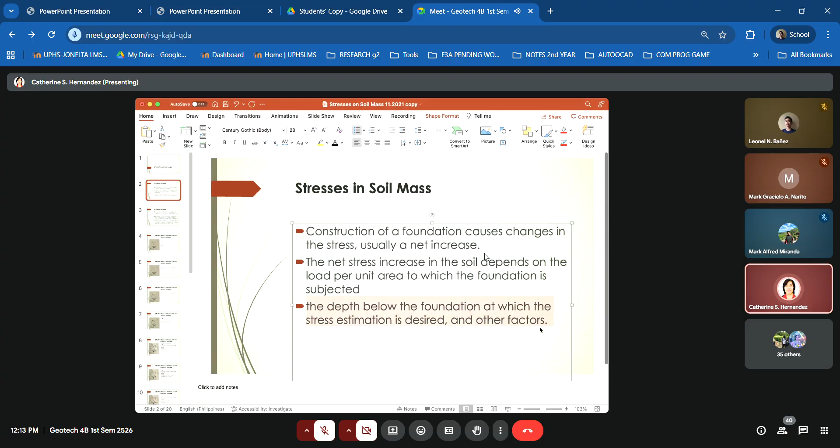It is necessary to estimate the net increase of the vertical stress in soil that occurs as a result of the construction of a foundation, so that we can compute the settlement.

If the settlement you compute as an engineer is excessive, you have to redesign the foundation or do the necessary calculation over again.

This chapter discusses the principle of estimation of vertical stresses, and the vertical stress increase in soil caused by various types of loading.

Although natural soil deposits in most cases are not fully elastic, isotropic, or homogeneous materials, calculations for estimating increases in vertical stress yield fairly good results for practical work.

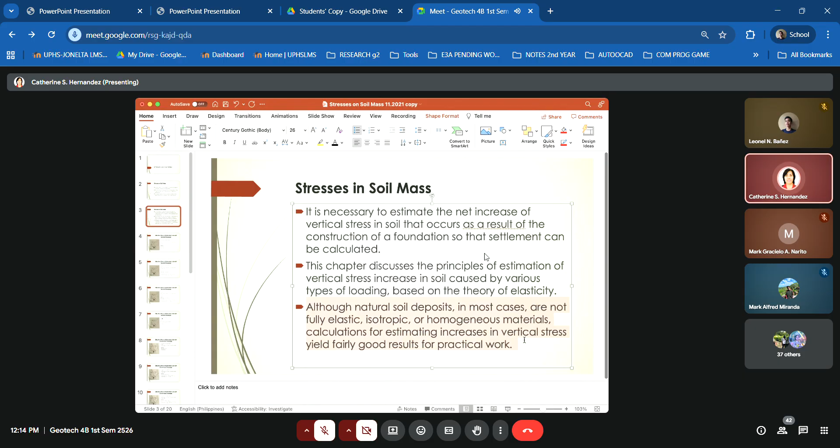We have different conditions of soil, depending on whether there is no seepage, or there is seepage, either upward or downward.

This first one is the effective stress of saturated soil with upward seepage.

Our formula for total stress is the unit weight times the height, or the layer of water or layer of soil for that matter.

The effective stress is the total stress, minus the pore water pressure, or simply pore pressure.

So our effective stress formula is: unit weight times height, minus unit weight of water times the height or the layer of soil or water.

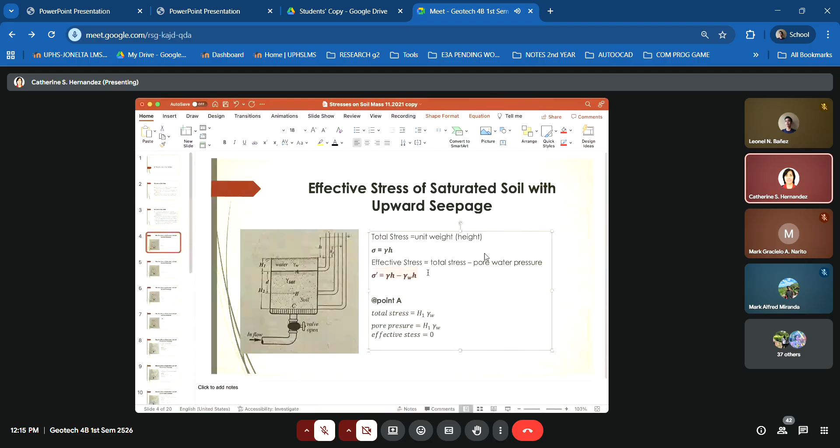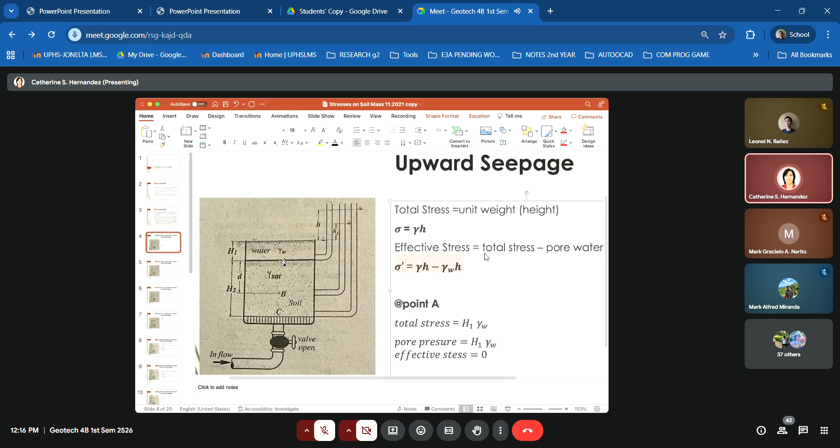Now in this figure, we have point A. There is an observation pipe for point A, for point B, and also for point C.

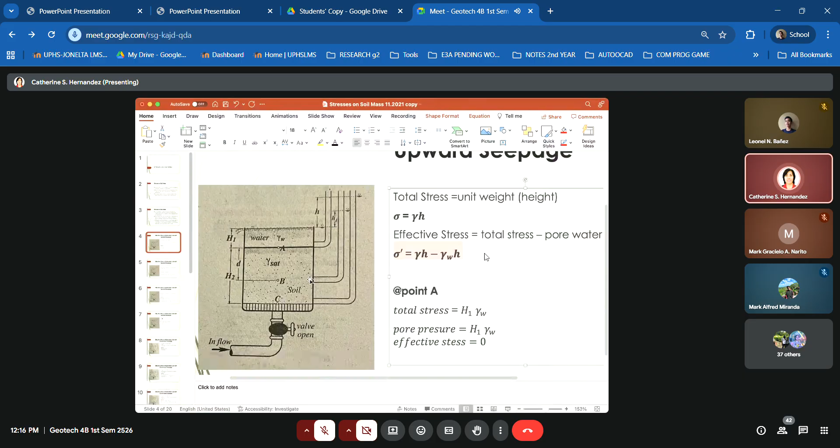Now, at point A - here is point A.

The total stress would be equal to H1, this height here, multiplied by the unit weight of water.

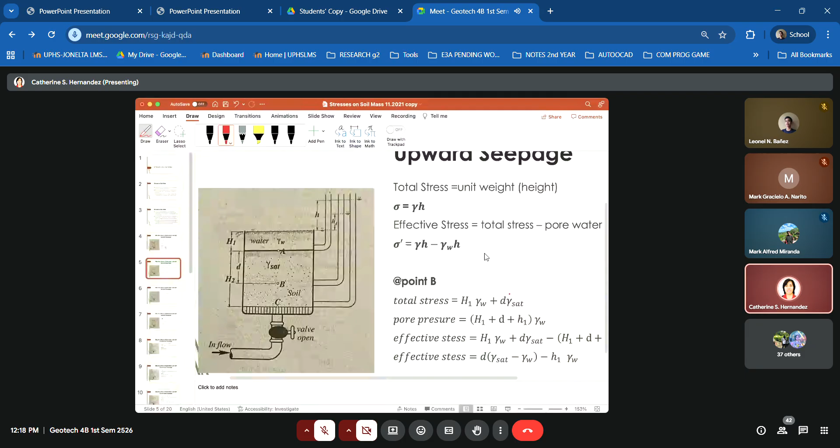So our total stress would be H1 times unit weight of water. And then D, since H2 goes down to the bottom, this is what we consider for the soil.

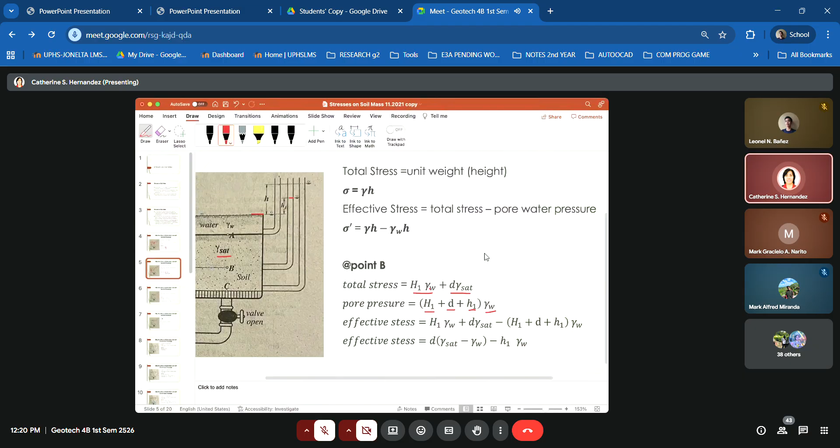And then you multiply it with the unit weight of water. Kaya pag pinagsama natin, total stress minus pore water pressure, nare-reduce yung ating formula dito. Kasi kumbaga ito ay makakancel ito tsaka yan. Kaya ang matitira na lang, gamma sat

Unit weight na saturated minus unit weight ng water times the depth of D. Tapos, bawas yung h1. So, sa inyo, pwede naman ito ang isaulohin nyo, the rest will follow naman. Magka-cancel out lang din yan.

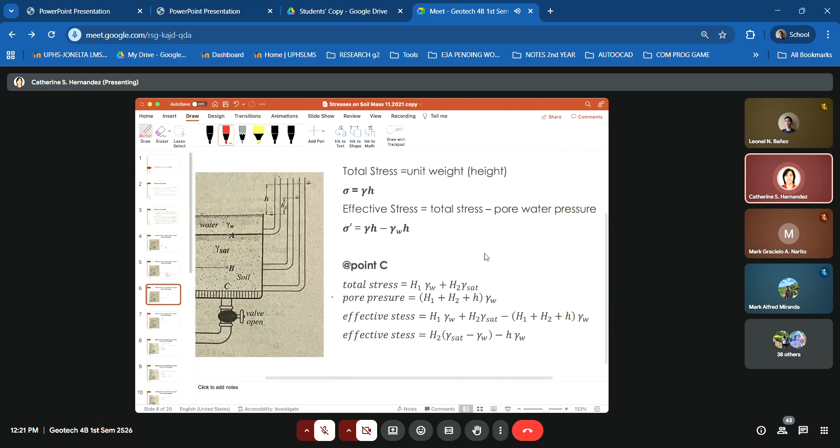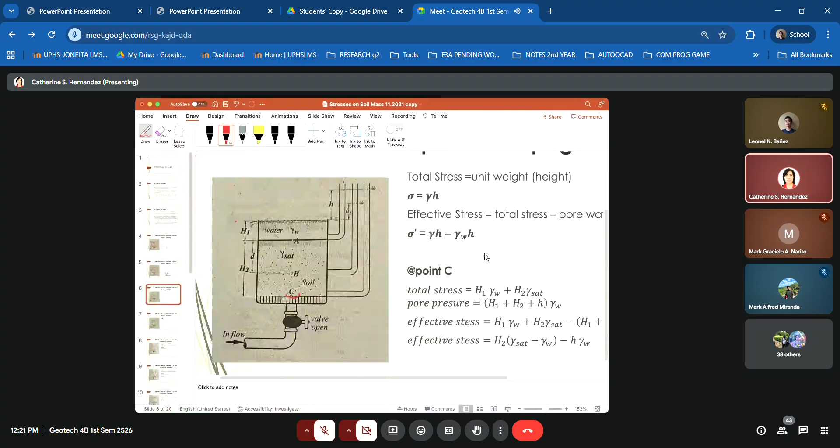Okay. And then for letter C or point C, si point C ay nasa bottom, dito. Ang total stress niya would be buo na: H1 times the unit weight of water, tapos H2 times the unit weight na saturated.

Tapos ang pore pressure would be yung H1 times the unit weight of water, H2 times the unit weight of water, at yung difference ng elevation ng water sa container and the elevation of water at C dito, sa observation pipe sa point C. So yun yung dadagdag, H.

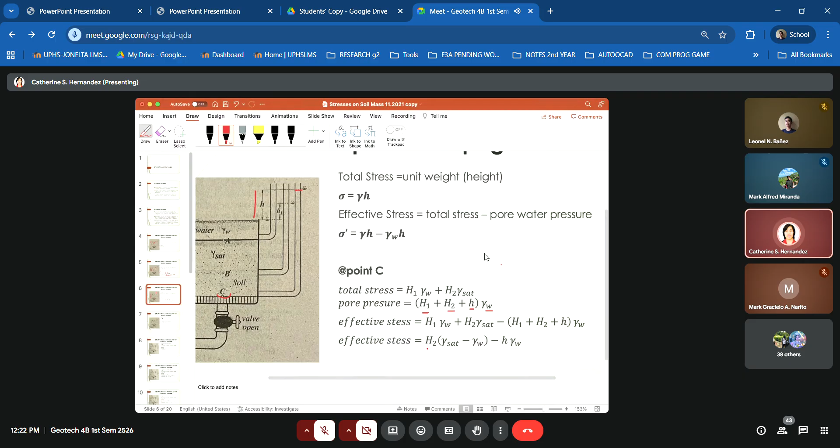And then, pag sinimplify natin, simplify natin, effective stress would be equal to H2 kasi ito ay makakancel na to, tsaka yan. Tapos, ang matitira ay unit weight saturated minus unit weight of water times H2 minus the height of H water dun sa yung difference, times the unit weight of water.

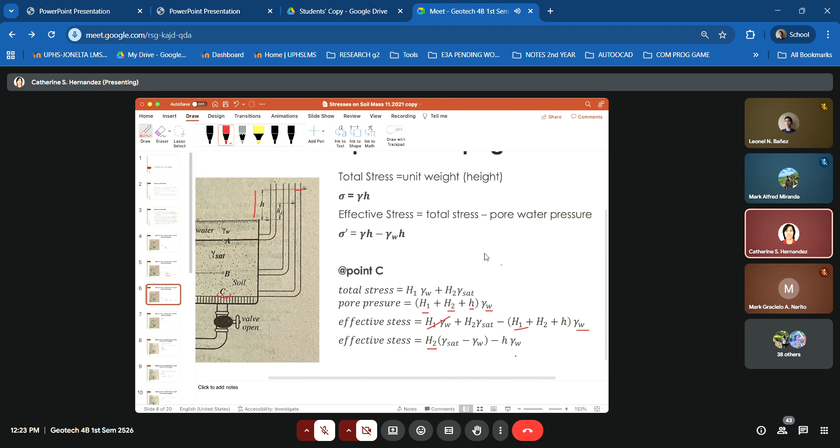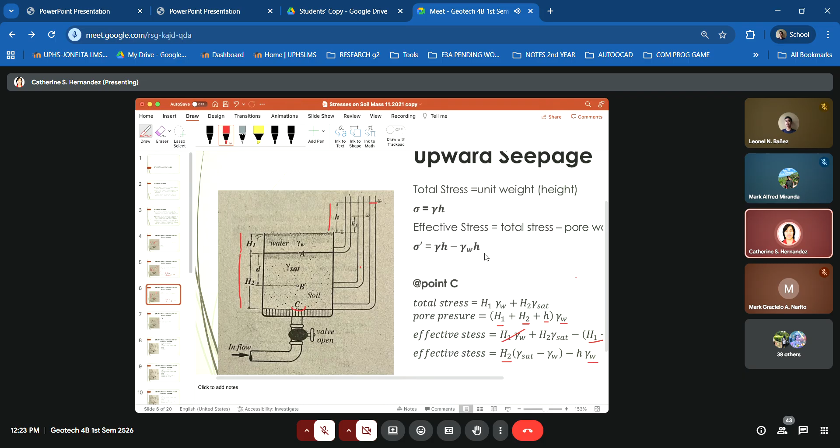So ganyan pag ang seepage ay pataas. The tendency of the water is to go up the pipe. Pag naman downward ang seepage, pababa naman syempre, kasi kumbaga bababa yung tubig dun sa pipe naman, pababa ang agos. Ito ay pataas, upward ang seepage.

Kung sana upward, downward. Another formula that you might encounter, yung seepage force per unit volume. Force is equal to height or head loss, H, head loss divided by the length of soil times the unit weight of water. Or simply, di ba dun sa natin, hydraulic conductivity, you encountered I, hydraulic gradient, that is the head loss divided by the length of soil. So, yung formula could also be written as I times the unit weight of water.

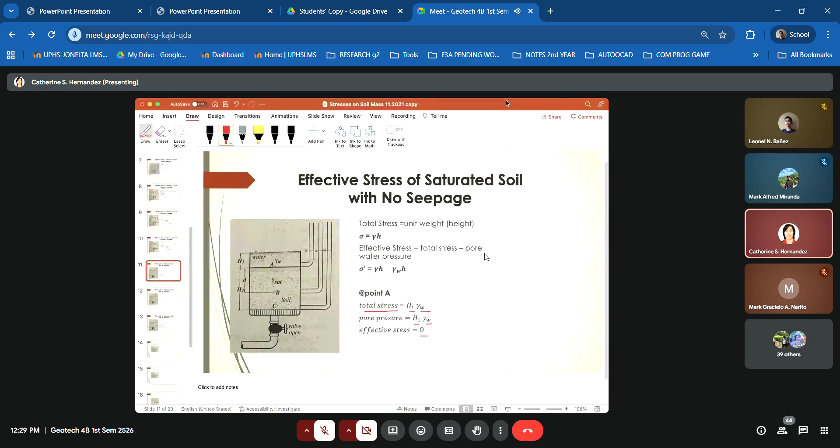May soil condition din tayo na ideal, parang theoretical lang ito - walang seepage, ibig sabihin hard strata yung nasa ilalim kaya hindi bumababa yung tubig. Ang total stress natin sa point A ay equal to H1 times unit weight of water. Tapos ang pore pressure ay H1 times unit weight of water. Sa tatlong conditions, pare-parehas na ang effective stress sa top ng soil ay 0, dahil nagka-cancel out lang yung stress due to water na parehas.

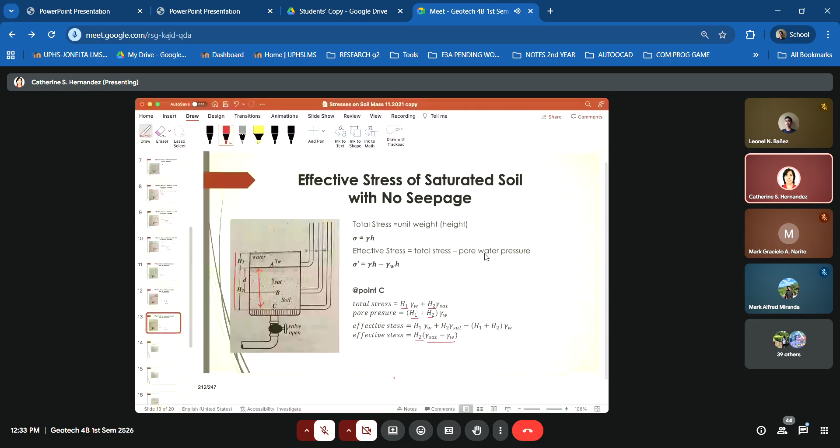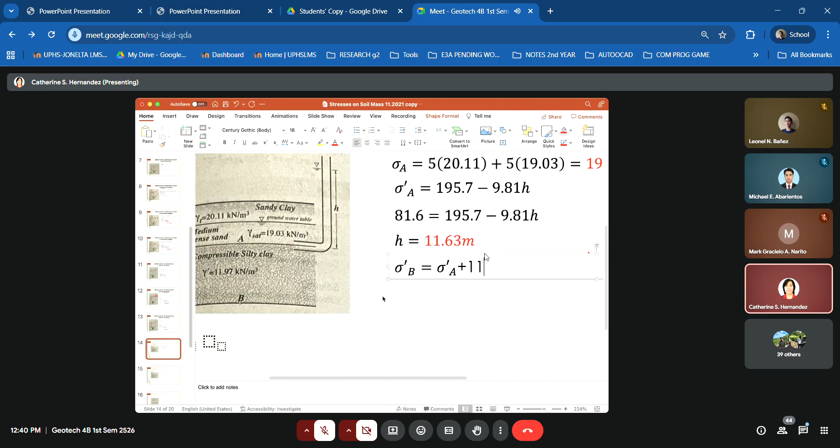Plus 11.97 times yung depth na 20. Yun na yung effective stress at B. Ayan ako. Sisave ko para mamaya.

Okay. Dito na lang pala sa dulo. And our answer is, for the effective stress at B, dapat pala lagay ko dito. Sa A is 19, 81.6. Plus 11.97 times 20. 321.01 kilo Pascal. Okay.

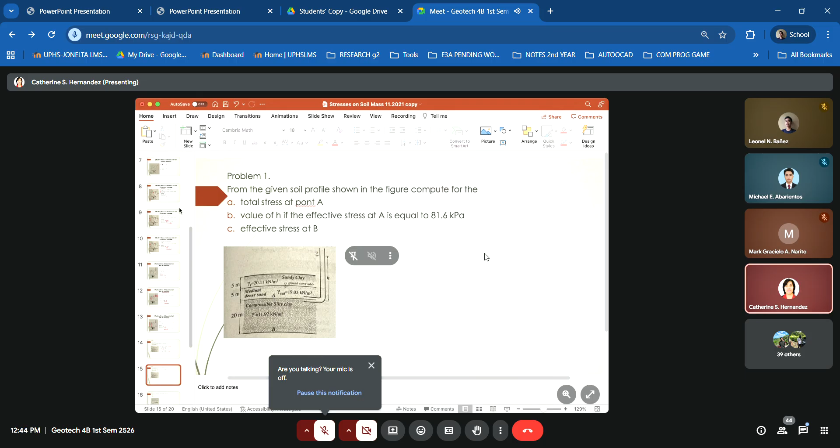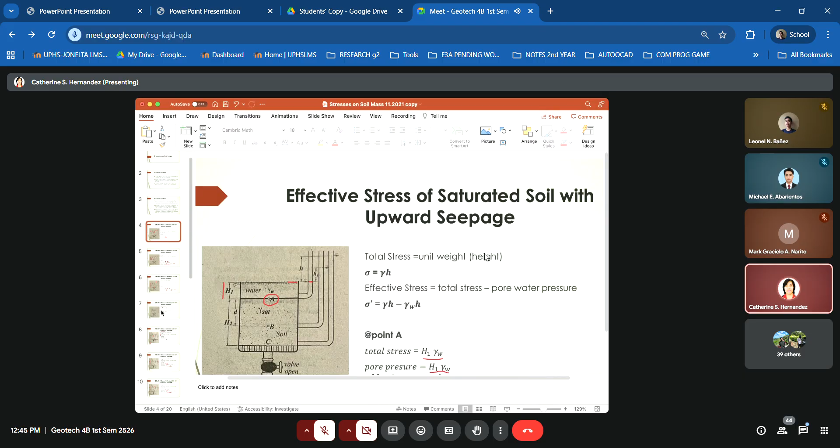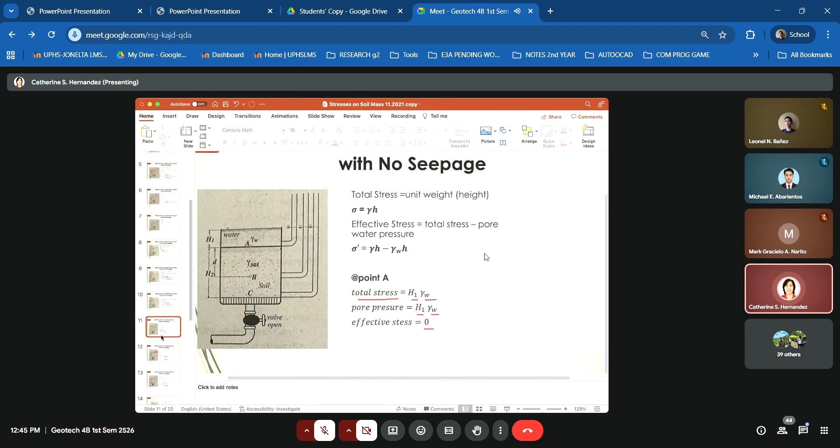Babalikan ko ha. Ito yung case 1. Look at the elevation of water inside the observation pipes. Tapos ito yung case 2. Tapos ito naman yung case 3. Now, what I'm asking is anong case yung problem, itong problem na to?

Case 1, upward yung seepage. Okay. Sunod, ito naman tayo. Ito ko yung edit yun. Problem 1 nga, no? Okay.

Okay. So, in problem number 2, walang observation pipe. Simply layers of water lang, tapos sa ilalim ay rock. Kaya, ibig sabihin, ito naman ay anong case? This problem number 2, anong case ito?

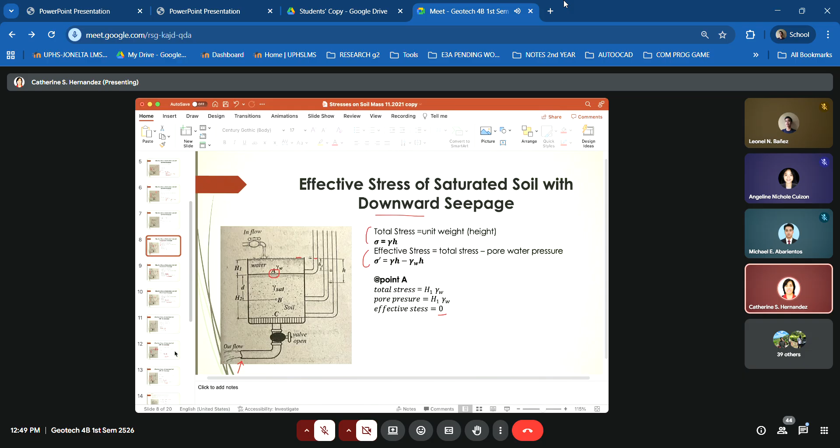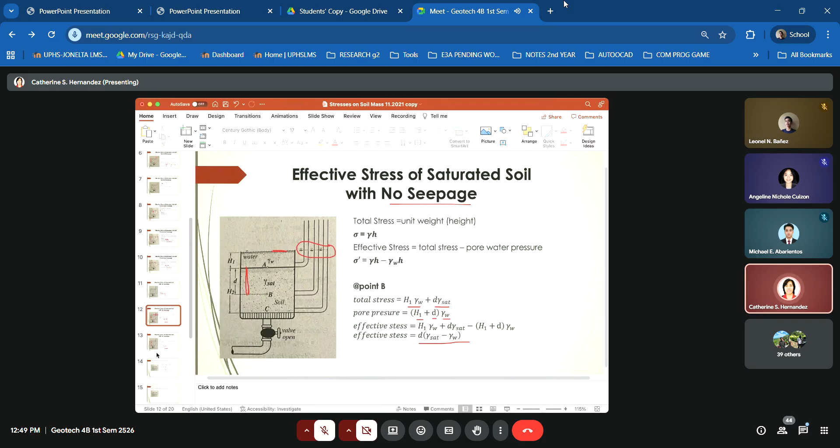Yung elevation ng water ay constant, no? At sarado yung valve sa ilalim. Ibig sabihin, hindi tumatagas yung tubig, no? So dito class, sa second example, tingnan ninyong maigi, rock yung bottom. So what will happen? Yung tubig, hindi siya bababa or mag-seep in dun sa bottom layer. So that's case 3, no? Case 3 ito.

So dito sa case 3, pinapahanap yung effective stress immediately below A. Yun nga lang, hindi agad binigay yung unit weight ng soil. Kaya kailangan nating i-compute yung unit weight ng lupa. Now, dun sa nasa first layer on top of A ay dry, no? Dry sand. Di kunin natin muna yung dry unit weight nung sand sa ibabaw. Nare-recall niyo pa ba? Formula for dry unit weight.

Dry unit weight. Saan na yun? Okay. Dry.

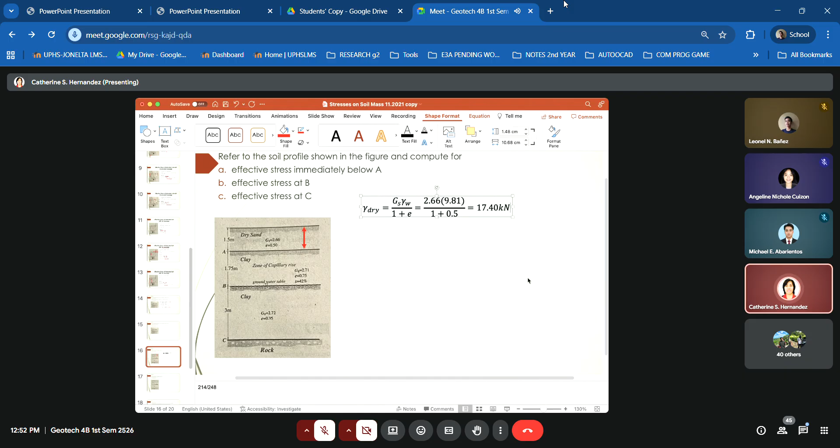Kilonewton per cubic meter. Okay, pag nakuha na natin yan, pwede na natin kunin ang total stress. Total stress would be equal to, ano ba natin?

Total stress. Total stress natin would be yung unit weight, 17.40, times the height of 1.5. So that's about 26.1 kilopascal.

And then, pinapahanap ay immediately below A. Now, we can compute for the pore water pressure. Dun sa libro, U ang tawag dito, yung letter na ginagamit for the pore water pressure.

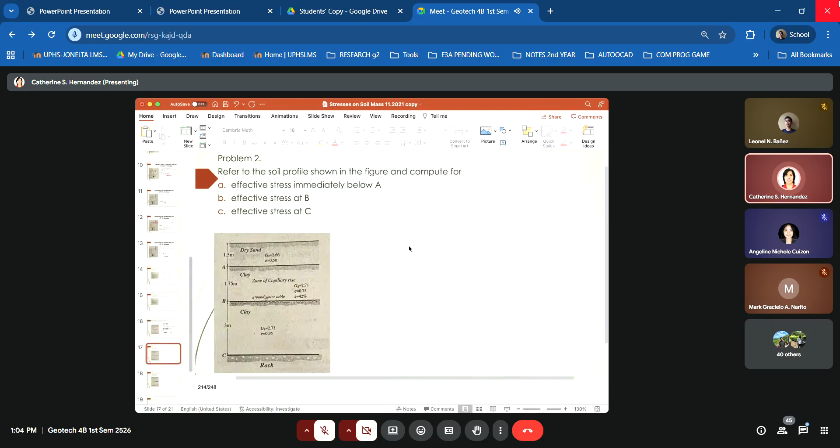Copy tayo dito para madali. So, dito sa C, saturated. So, ang formula natin for saturated is GS plus E times the unit weight of water, over 1 plus E.

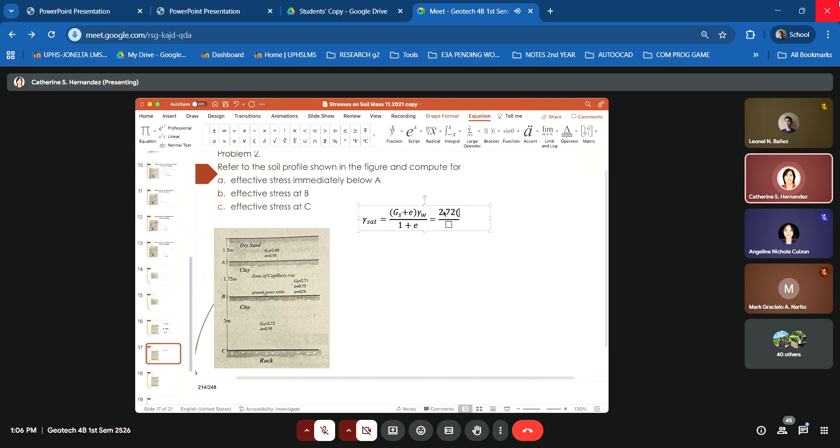Okay. If we're going to substitute the values in the given problem, we have: ang GS bottom ay 2.72, dapat parenthesis, plus ang value ng E ay 0.95. Unit weight ng water, 9.81. Below would be 1 plus the value of E is 0.95.

Okay. With that, ang saturated unit weight... ay 18.46 kilopascal. Ay, unit weight pala to. Kilonewton per cubic meter.

18.46. Sunod ay pwede na natin gamitin para makakuha ng effective stress at C. So, ang ating effective stress at C, gagamitin natin yung 55.78, yung sa B. That would be equal to 55.78. Bale, yung sa C ay effective stress at B plus yung distance na 3 times the saturated unit weight minus unit weight ng water.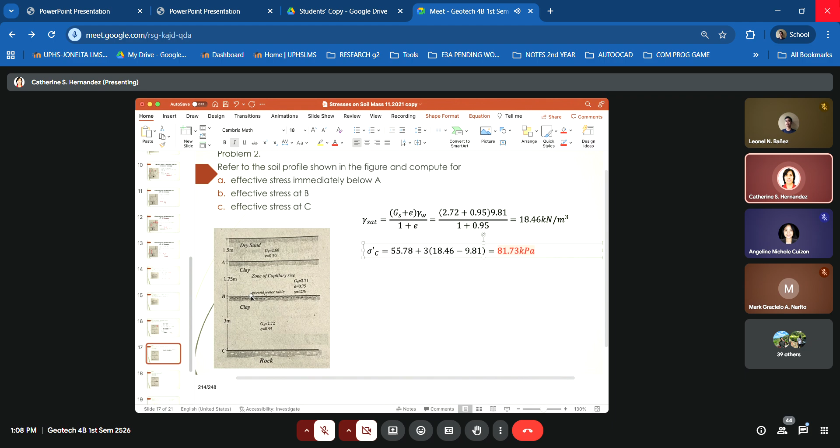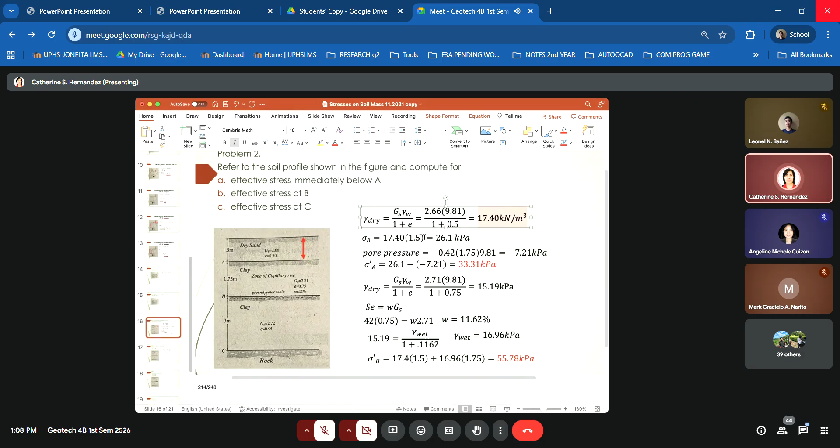Okay, so from dry soil sa top to moist soil and then saturated dun sa pinakang third layer. So what we did is determine the dry unit weight ng first layer, multiply it by the height. Tapos determine the pore water pressure and i-minus siya dun sa effective, sa total pressure minus pore water pressure. We have 33.31. Sa point B, what we did is determine the wet unit weight, and then i-add natin siya dun sa effective stress at A. So ito yung effective stress at A, at ito yung additional, at sa B, ito na siya. Doon naman sa C, effective stress at C, tapos additional yung stress na co-contribute ng layer, yung final layer from B to C. Ayan. Okay na.

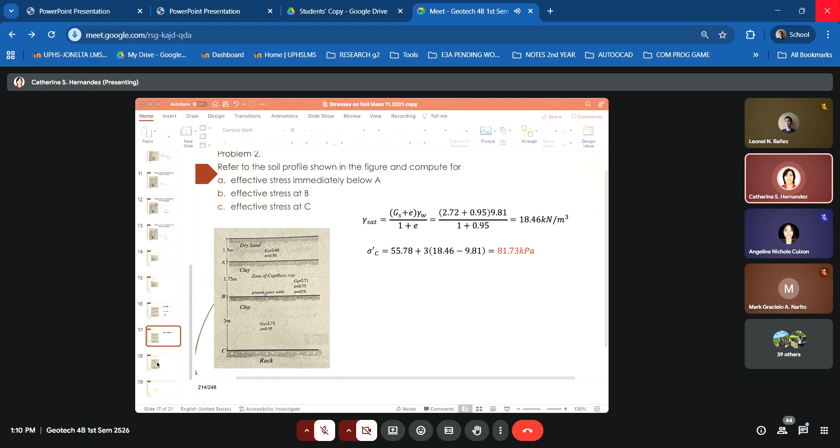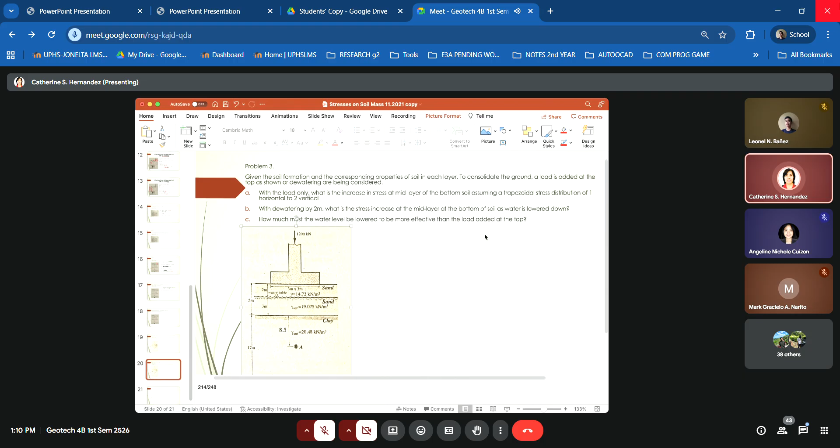Next example ay ito. So this one ay merong footing, may structure na naka-rest dun sa ground. So ano mangyayari? Merong siyang change in pressure due to this load. So, given the soil formation and the corresponding properties of soil in each layer, to consolidate the ground, a load is added at the top as shown, or dewatering are being considered. So, it's either dadaganan daw yung lupa para ma-consolidate, or ibababa yung level ng water para you will get the same result, kasi pag ibinaba mo yung level ng water, ang tendency ay tataas ang pressure din, kasi kung yung presence ng water ay nagpapababa ng pressure, mas lighter kasi yung tubig kaysa sa soil.

With the load only, what is the increase in stress at mid-layer of the bottom soil, assuming a trapezoidal stress distribution of one horizontal to 2 vertical?

Yung ganitong case, yung sinasabi niyang one horizontal, 2 vertical, ang mangyayari dito is magkakaroon tayo ng parang yan, parang palda, sa magkabilang side, kasi habang bumababa ka, yung pressure sa ilalim ay lumalaki. Nagiging wider to.

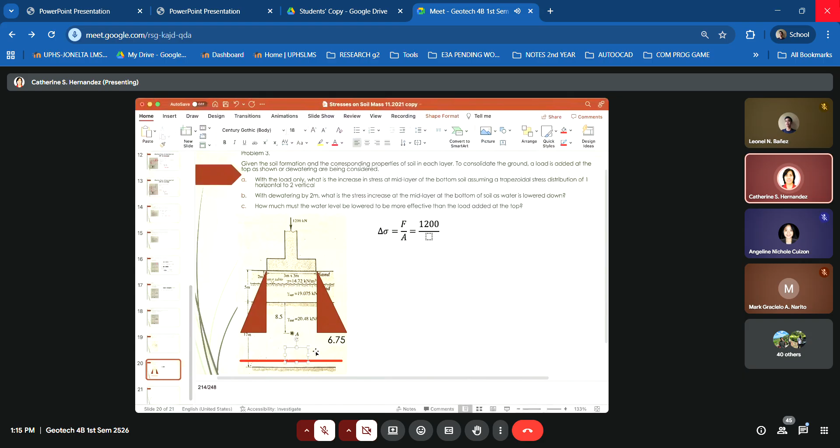Divided by yung area natin. So sabi ko nga, i-combine natin yan, and yan yung magiging base natin, yung bottom. So this one would be equal to 6.75. Mali yung akong pagkakatype. Ito, 6.75 yan. So ito, parang kinuha mo lang yung equivalent yung base niyan dun sa total height ng soil.

from the bottom of the footing papunta dun sa point A. Kung titingnan ninyo, that is 8.5 plus 5. Yun yung kanyang lapad ng dalawang triangle, plus 3. So yung pinakang base mo would be equal to... kala ko naman ang lagay ko, 13.5 plus 3, 16.5. Ito, pinakang base. Yan, okay, base.

Kaya dito sa change in stress, that is 1,200, tapos kumbaga pag nasa ilalim, since square yung foundation mo, lahat ng sides, parang papalda, parang skirt na palapad yung bottom. Kaya yung area mo would be 16.5 times 16.5. Yan, ito na yung change in stress due to the application of the foundation.

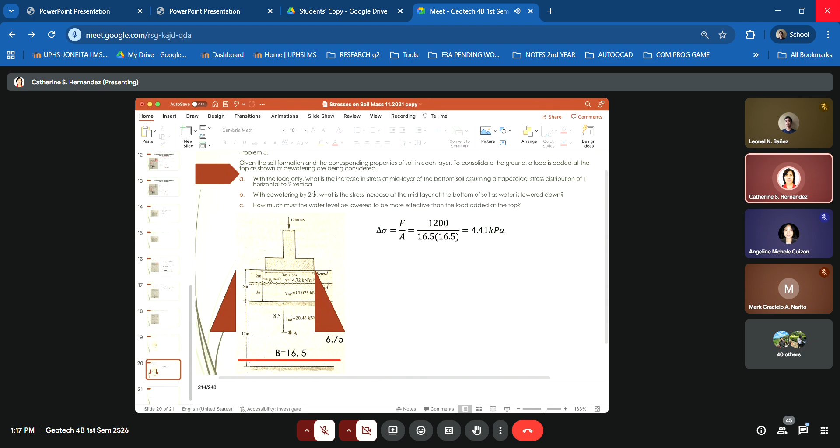Tapos sa B, with dewatering by 2 meters, what is the stress increase at the mid-layer at the bottom of the soil as water is lowered down? Ibig sabihin dito kasi sa original figure, yung tubig ay 2 meters from the bottom of the foundation. Ang gagawin is ibababa mo siya ng another 2 meters. Kaya yung saturated soil would only be 1 meter at yung part dito ay moist lang, no? Moist. Magiging moist soil lang yung another 2 meters right below ng water table ngayon, yung existing bababa.

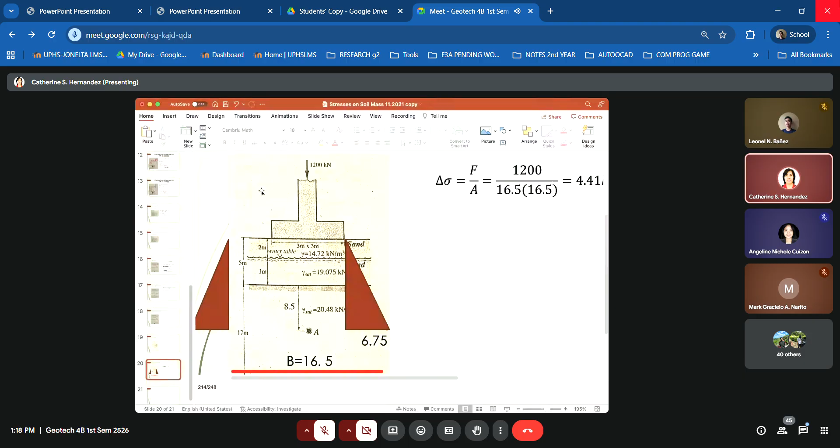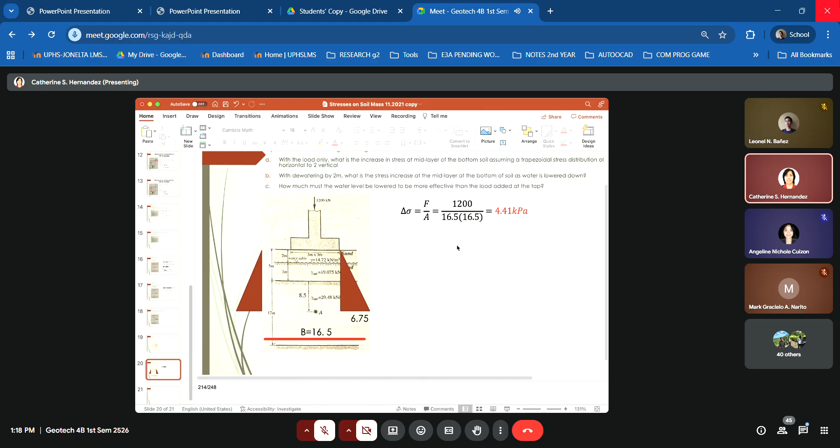Okay, so dito sa pangalawa, so this is for A, no? Tapos sa pangalawa, we have to lower down the water table by 2 meters. Lower the water table by 2 meters, ano mangyayari? Maiiba yung stress natin. So at point A, before ma-lower yung water table, kunin muna natin yung stress at A.

Stress at A. Okay, before mag-lower ang water table. So yan ay 14.72, yun yung unit weight dun sa taas, no? Times, so moist siya, times 2 meters yung kanyang height, plus yung right below nung 2 meters ay saturated yung lupa, no? Nandun yung water table sa ibabaw niya. So ima-minus natin yung unit weight ng water dun sa saturated unit weight. Minus 9.81. Saka natin i-multiply sa 3.

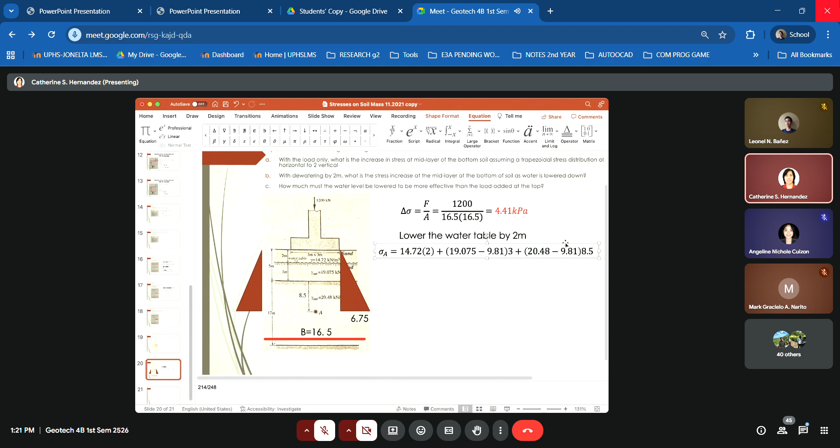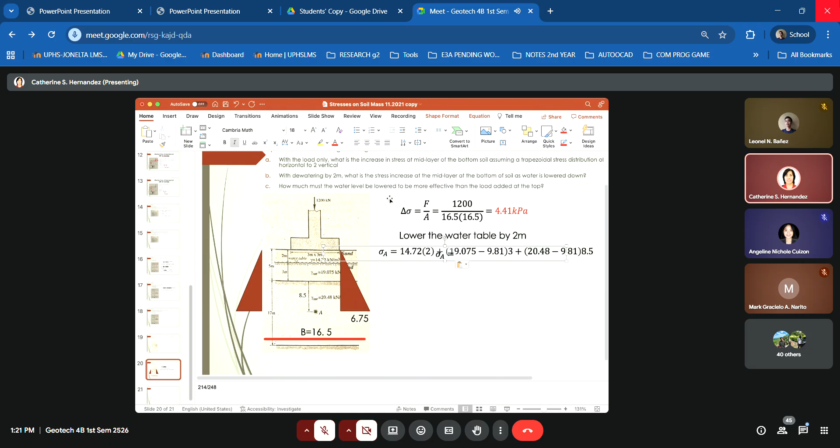Hindi, magkasama to. Bakit kaya napunta to? Yan, babain ko. Recompute, hindi siya tugma. 14.72. May isa pa. Bali ito ay okay, tama naman. 14.72 times 2, 19.075 minus 9.81 times 3, 20.48 minus 9.81 times 8.5.

Yan, 147.93. Pero best ko nga ako itong kinompute kasi nasa libro ibang value. Kasi naduling ba ako? O yung libro ang mali? And then after lowering the water table, no?

So before lowering the water table by 2 meters. Tapos ito after. Okay, so dito mababago. Nangyari dito ay 14.72 times 2.

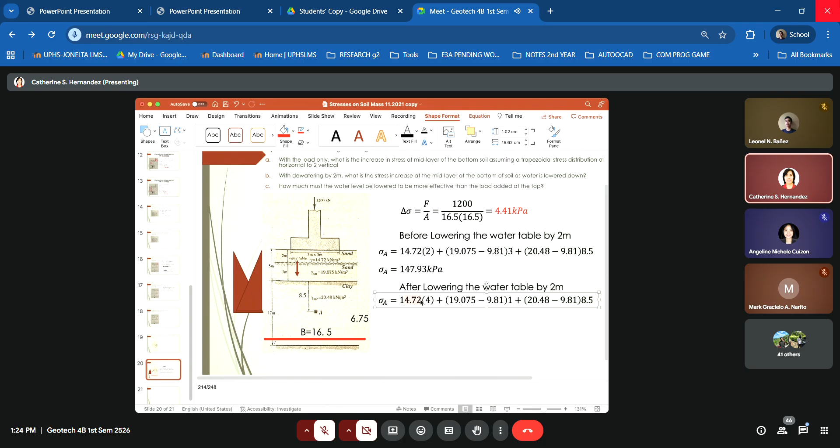Yan. Ibinaba. Kaya itong depth na ito ay magiging moist na lang yan, no? Moist. Tapos itong portion na to, naging 1 meter na lang. And then yung nasa bottom niya will remain the same kasi hindi naman siya na-reach nung nabawasan ng tubig. Okay? And so ano yung, ano dito? Ano yung value?

Dito, class, anong value dito? 158.84. 158.84 kilopascal. So ang sabi ay, what is the increase in the mid-layer stress increase dun sa mid-layer at the bottom soil?

Okay, usually class dito nga pala sa mga stresses, no? Ang tinitingnan ay yung clay layer kasi siya yung problematic soil. Okay. Kaya ang mangyayari is yung difference natin, no? Difference would be...

itong 158.84 minus 147.93. Ito na yung difference. 10.81 ba? 10.91. Okay. .91 kilopascal.

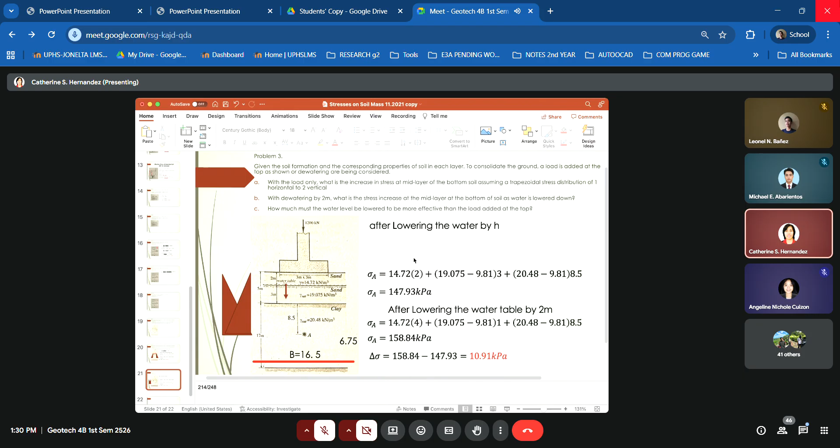Kakapi ko na lang. After lowering by H meter, kasi ang option ay pwede mo rin i-lower yung water, imbes na lagyan mo ng additional weight, the water by H meter. How much must the water level be lowered to be more effective than the load added at the top? Copy ko na lang ito.

Okay, kukunin natin yung stress. Kung ilo-lower natin yung tubig, hindi natin alam kung ilang meters. So pwede natin i-assume na, hindi na pala ito magiging stress lang. Okay, insert. Hanggang bottom tayo, ready. Okay, dito would be equal to 14.72.

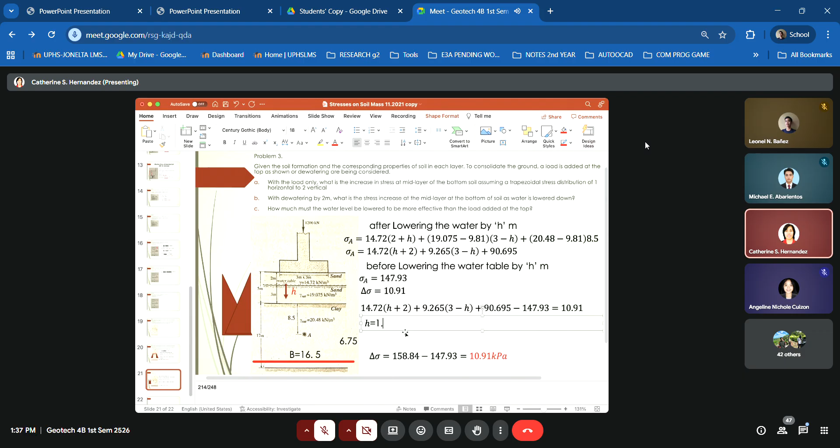Ayan. So the value of H is equivalent to 1.74 meters. So yun siya. Ito na. Ayan. So,